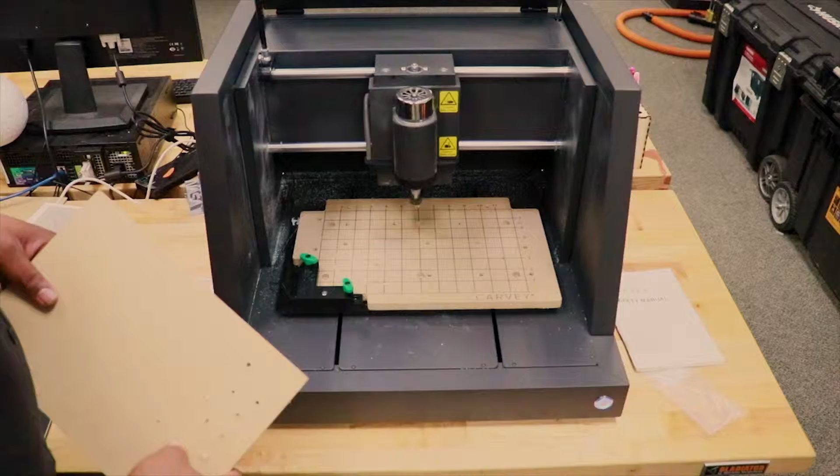Alright, so now we're looking at the inside of the Carvey. The first thing you'll notice is the platform that we have. The Carvey comes with an 8-inch by 12-inch platform, and that is a non-configurable platform, so we can't expand or change those sizes. Usually with something like this, you will not even always get up to that 8-inch by 12-inch size because of the clamps. It has a smart clamp and it has several clamps that have to be on the sides before you start your cut.

Also, it has a Z depth of 2.75, so you'd want to take that into consideration when you're choosing your drill bits, because the length of your drill bits will also affect the depth of cut that you will have with the Carvey. So right now we're just going to go ahead and set up our board and put in the clamps just so you guys can see how that would function.

So what you want to do is, depending on the depth of your material, you want to raise your smart clamp to be exactly at the corner of your material, because we're going to put in our board to just show you guys how the clamps work. So the first thing you want to do is lift up your clamps, and that would correspond to the depth of your material.

And also we have different sets of clamps for different types of tool bits. So if you have a much wider material, you would want to use a longer pin to hold your clamps down. I'll just add an extra clamp on the sides.

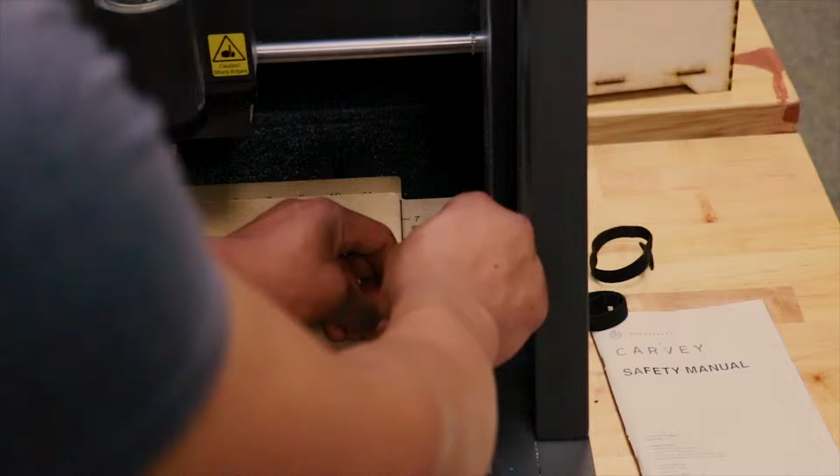Alright, so another cool thing about the Carvey is that it comes with different drill bits, and we can get all these drill bits from Inventables. They're usually $10 per set, and we usually recommend that you come in with your own drill bits just so that you're aware of the material you're using and making sure that you're using the right drill bits for it. We do have some drill bits in the space, and we will help you with your projects using our drill bits when you're just learning how to use it.

Also, the drill bits range from a 1/16 to a 1/32 fishtail bit, all the way to a ball end drill bit for smoother cuts. Another important thing to keep in mind about the drill bits is that they come in different color codes for different types of cuts. So engraving cuts, or really smooth detailed cuts, all those details are on Inventables.

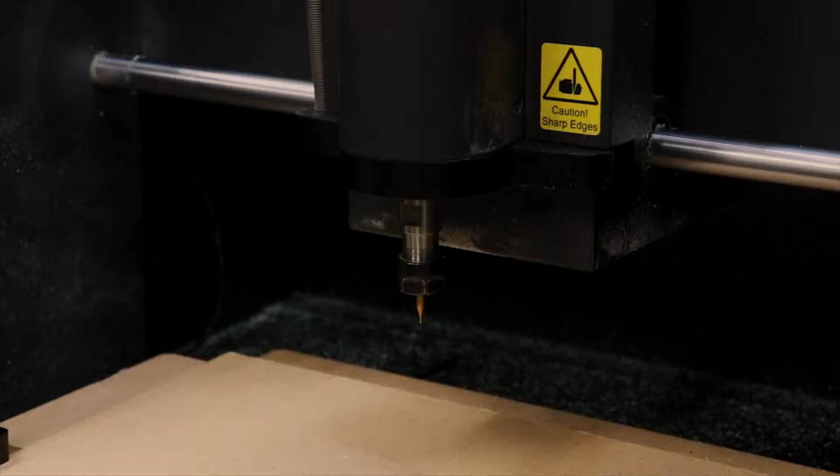Alright, so what we're going to be doing now is replacing a drill bit. To replace a drill bit, get your two size spanners. They both come in the kit, or ask for them when you're in the space. And basically, you hold and rotate in opposing directions. And that would release your drill bit from the spindle. And when you take out a drill bit, you want to make sure you put it in a place that's secure, because it can get lost very easily, and you definitely don't want that happening.

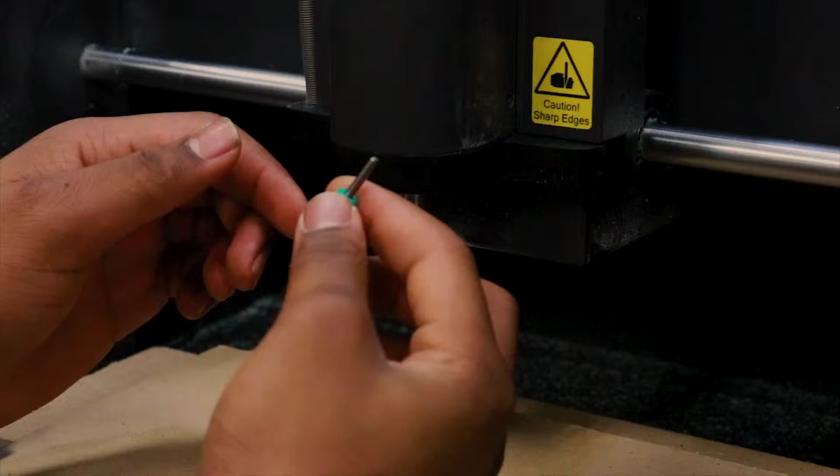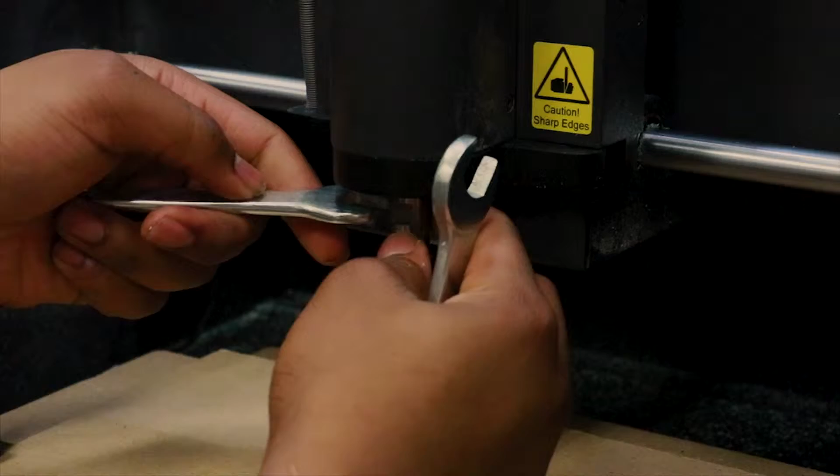Alright, so now we have a 1/8 fishtail drill bit, and usually the way you know the size of the drill bit is it's written on the ring, but sometimes if you're keeping them in sets, it's usually written on the container. So to tighten it, we're just going to do the same process, except we're going to be moving in the other direction.

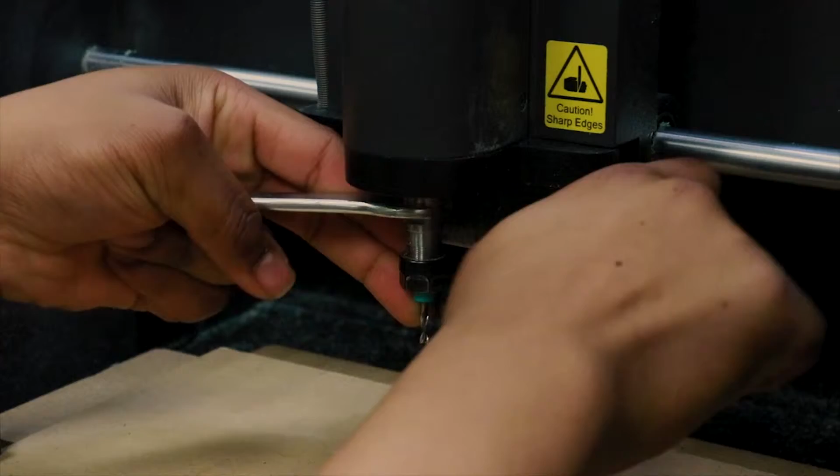And once it's tight and secure, I want to make sure it doesn't pull out or anything.

Alright, so we're going to be talking about the Easel software. The Easel software is the software that comes and works with the Carvey. You can also use other kinds of CNC cutting software, but I found Easel is the most easily accessible, and it's made specifically for the Carvey and other Inventables CNCs.

So a few things to know about the Easel software is that it is web-based browser software. So as long as you have access to the internet and a browser, you can access Easel. It is connected to your computer and connects to the Carvey via the printer cable, and the software can also account for a lot of user end settings.

So now we're going to go into Easel and we're going to set up our account. If you already have an Inventables account, you can just log in, but if you don't, you can basically create a free account. Alright, and now we're going to go into Easel.

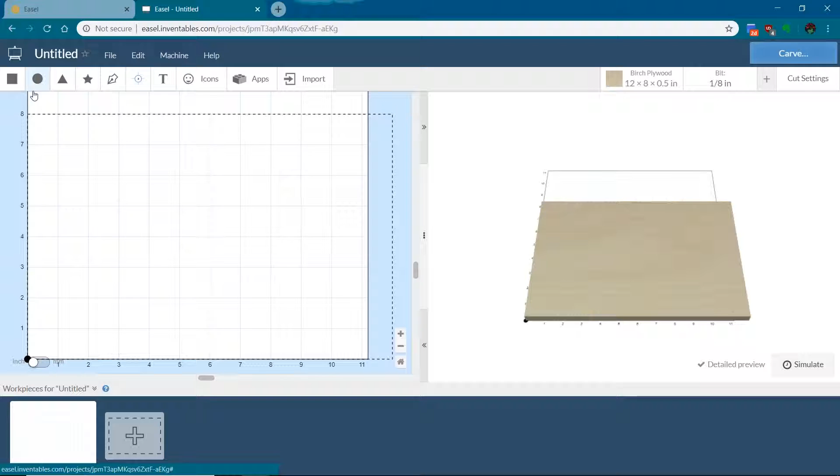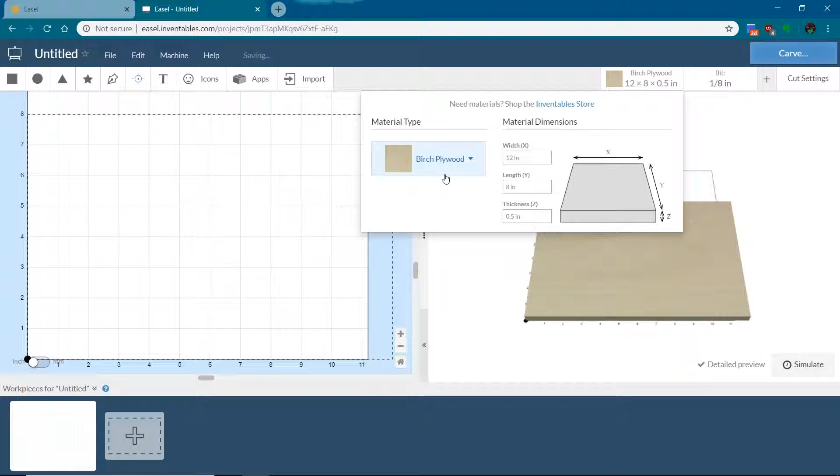One cool thing that the Easel software provides is an accessibility of different materials. If you have an idea of what material you want to cut, there's probably already a material type listed in the drop down option for you. And when you do select that material type, as you'll see here, a lot of things change, not just the material depth, also the depth of pass and the cut settings usually change with those materials. So if you had, let's say, HDPE, you see the cut settings change to adjust for that material.

There are different types of fill methods. There's the x-axis and the y-axis raster method. These are usually pro settings. The offset setting works just fine as well. You can also customize feed rate, plunge rate and depth of pass settings, but usually I would always just stick to the recommended. As long as you're using the correct material type and the correct bit, you shouldn't have to worry about changing your cut settings that much.

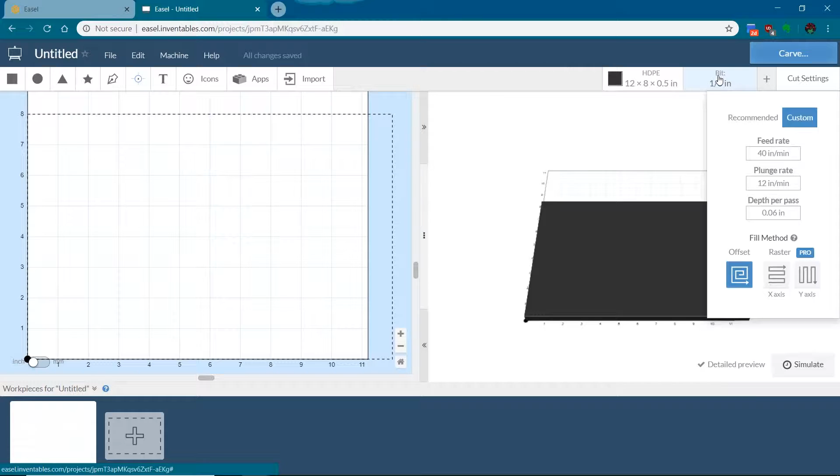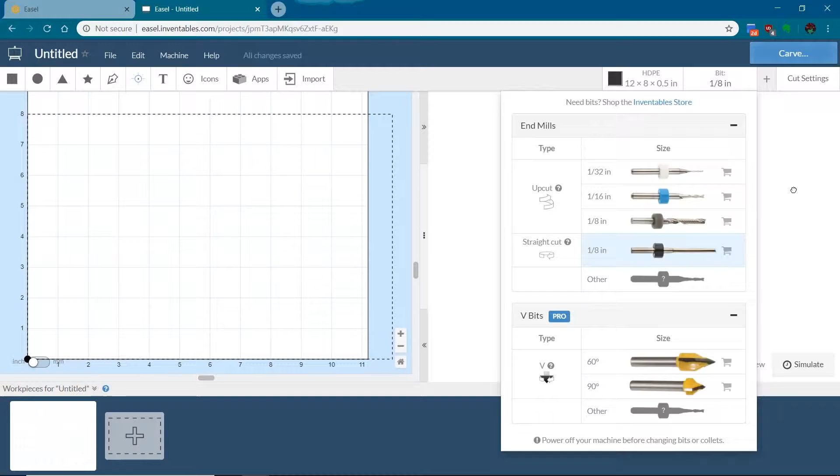We'll go into the bits. So as you'll see, there are different types of bits that correspond to the color codes we talked about with the Inventables drill bits and end mills. These will usually just be listed on here, and you can change and select them as you continue with your project. Over here we have a detailed preview that simulates anything that is in the cutting board.

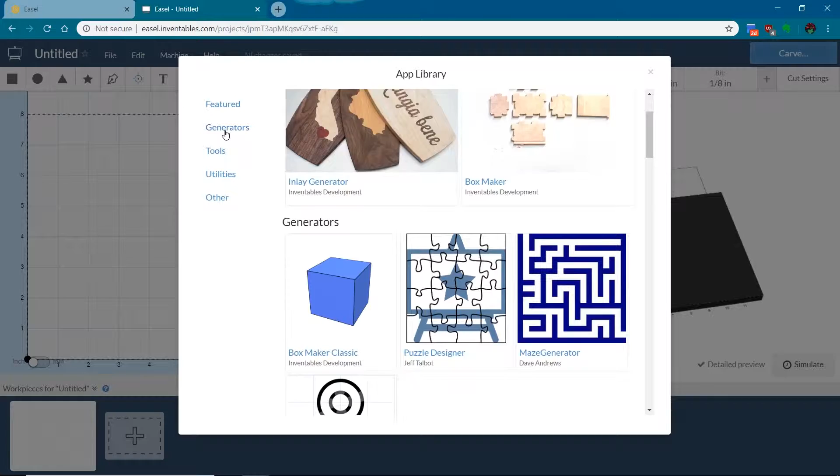We're going to work now and just import some already created files that are on here. So in here in the app library, there are different generators of things that are already made on the website that you can just import into your projects. There are different tools, utilities, and other options that you can just import and have on the go.

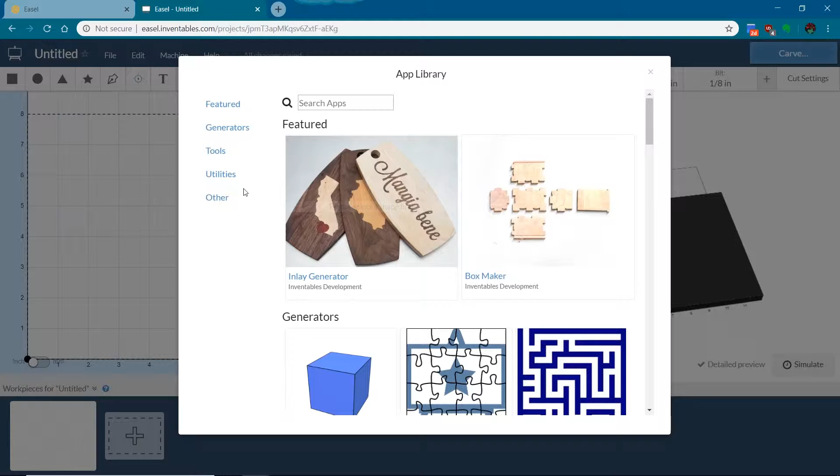We can also use the machine option to select your machine. So for this, we're using the Carvey. And the first thing we're going to want to do is to download the Easel driver. Alright, and now that it's downloaded, we're going to just allow it to install.

Let's try that one more time. Alright, maybe we should try extracting the files first.

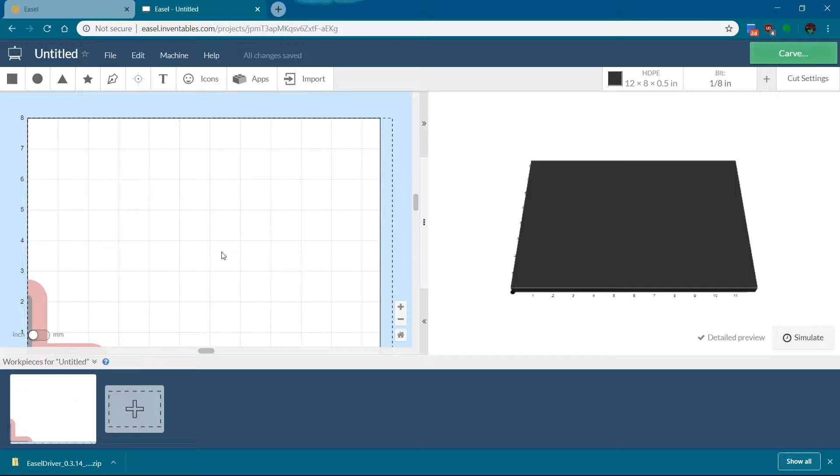Alright, and when that's finished, you are basically set to go. Whatever you upload in your menu will basically happen there. So now we're going to cut, and I'm going to go find a file. So basically we're going to go into the Inventables website, and they have a lot of projects that you can start on that basically will take around 15 minutes or less.

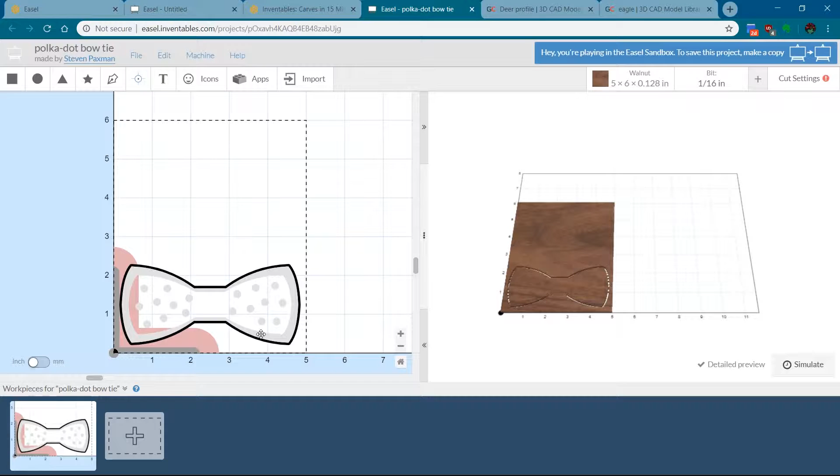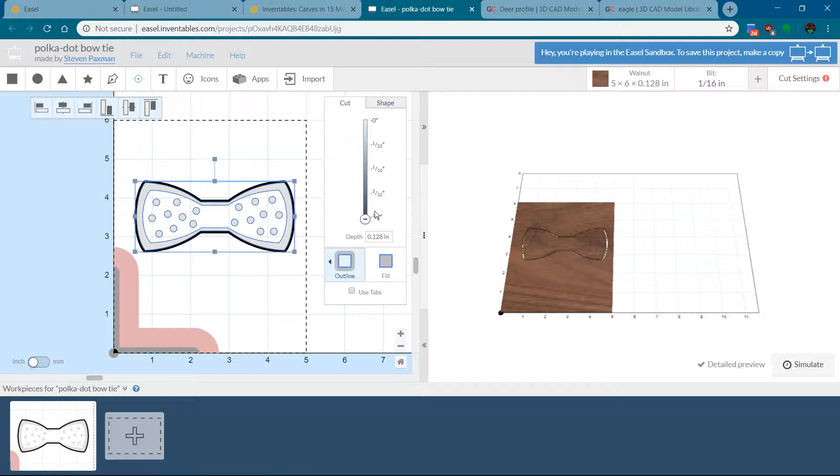And what we're going to do is this custom bow that is going to engrave some parts as well, so we can get into engraving. So on this side of the software, we'll have several options that you need to take into consideration. We have the object depth, so this determines how deep your cut is going to be. For now, we're just going to deal with an engraving, so we don't need it to go that deep.

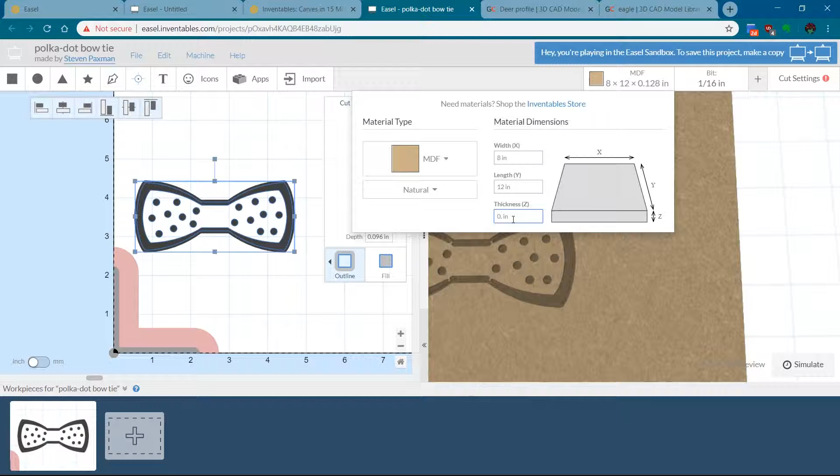We're also going to select the proper material. In there right now we have an MDF board, so we're going to select that, and also going to put in the proper dimensions, and it's an 8-inch by 12-inch board, my bad. And the thickness here, it is 0.5 inches thick. And over here in the simulate panel, you can kind of see when you have your object settings right or wrong. Clearly we don't have them set up in the right dimension, so I'm going to change those now.

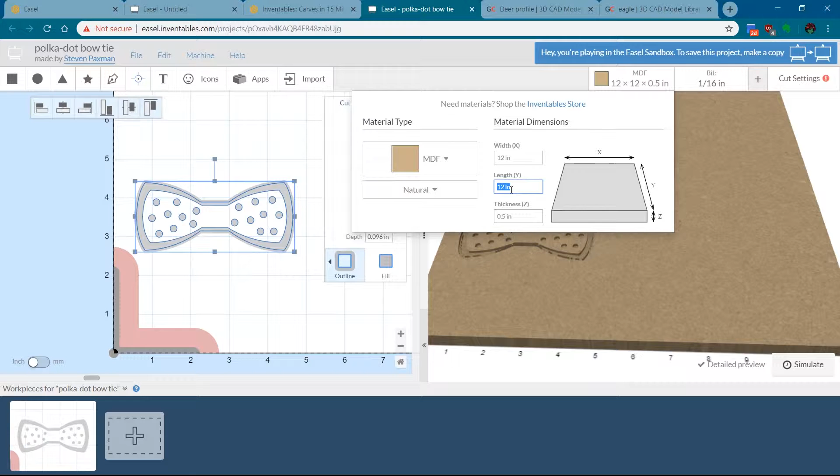Okay, so we can move our object around wherever we'll need it to be. One thing you need to consider is where exactly the smart clamp is. So whenever you're setting up your object, this area is basically inaccessible for you to use. Coming back to the material, we have two options here for outline and fill, and we even have different outline options. And this is basically for you to choose whether you want the actual object cut out, or you want an outline of the object cut out. So for now, we're just going to leave it as outlined.

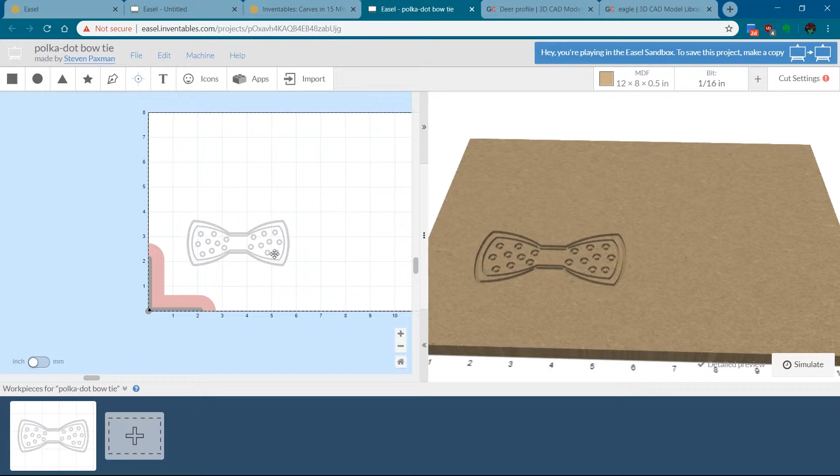You also have something for your endpoints, and you can decide whether you want your endpoints curved or straight. For now, we're just going to leave the endpoints because we don't need to edit them. Also for shapes, you have different positions for your object. You can put it in the X, Y position, or you can also change the dimensions by just clicking in and typing in the dimensions you need. We can also change the size, change the height. You can lock those so that they increase and decrease with the same ratio, and all that good stuff. So for now, we're just going to leave everything as it is.

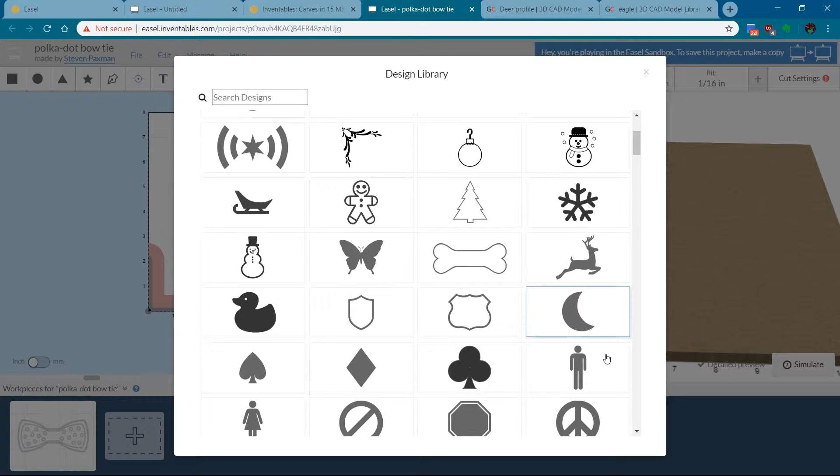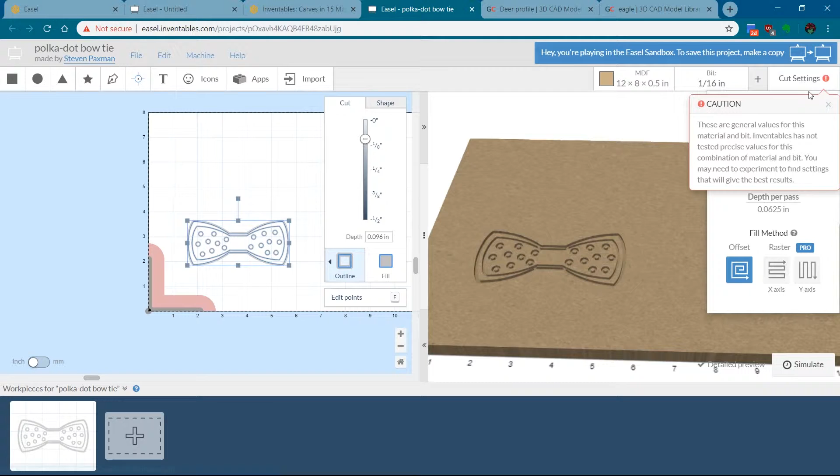We have different icons that we can add to make this even more interesting. There are definitely a lot of designs that are already handmade, so you don't always have to build your own thing, so to speak. Also, as I went over different apps and utilities and different cut settings, we have an alarm setting for the cut settings. We're going to go back and select a 1/8 inch bit. Alright, so now we're good to go, and we're set to start our cut.

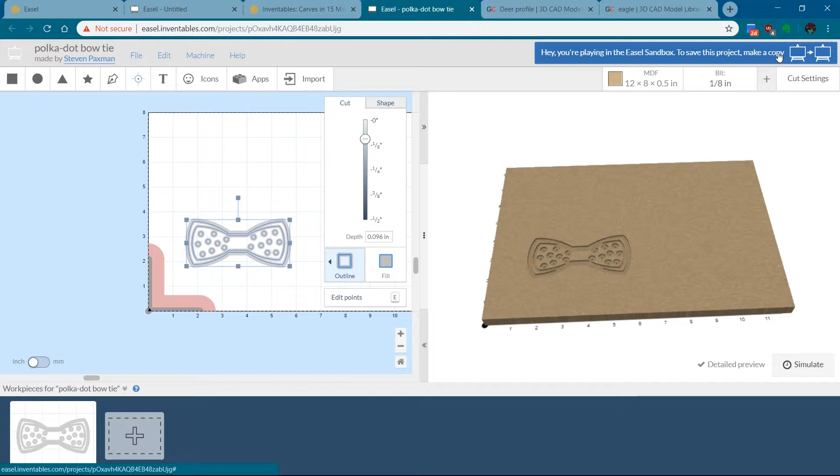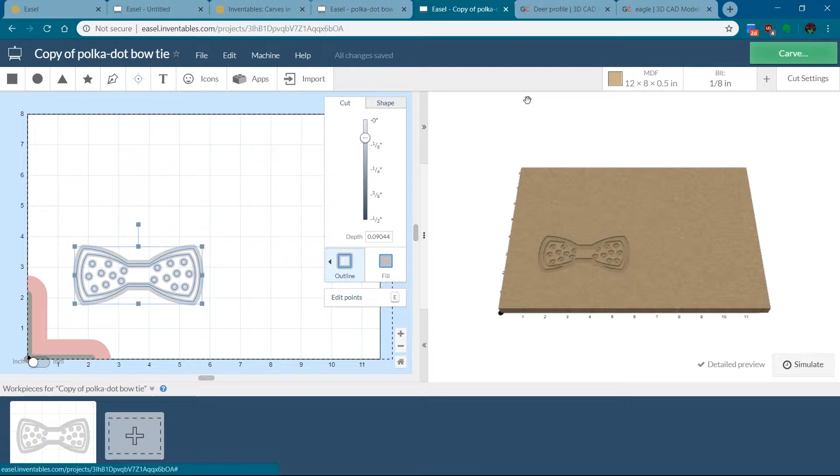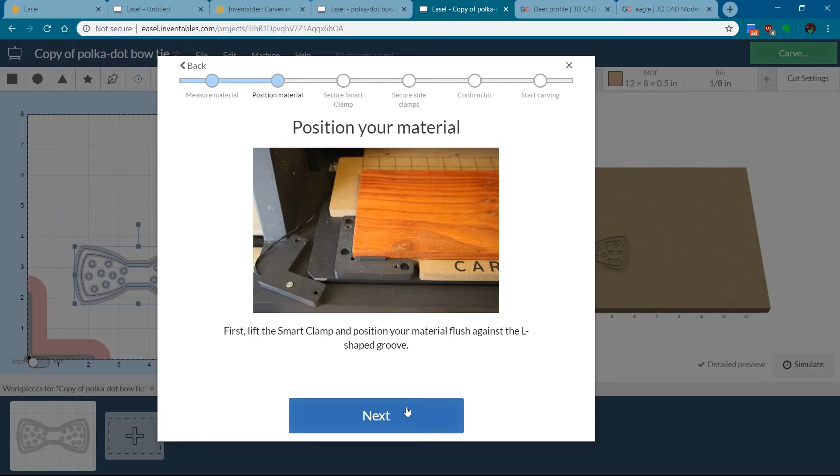So now that we're ready to carve, all we need to do is hit carve, and it's going to bring up a series of questions to make sure that we're set, and it's going to ask us to confirm the thickness. So we're just going to go back in there and make sure we have it cut to the specific depth we need, and then we're going to hit carve. So before you hit carve, you want to make sure you have the correct dimensions of your material. If you have a caliper, I would recommend you measure your materials to make sure that it's the correct height, and then we can confirm material thickness, and we can hit next. And as long as we've secured all the clamps and confirmed our drill bit, we can basically start carving.

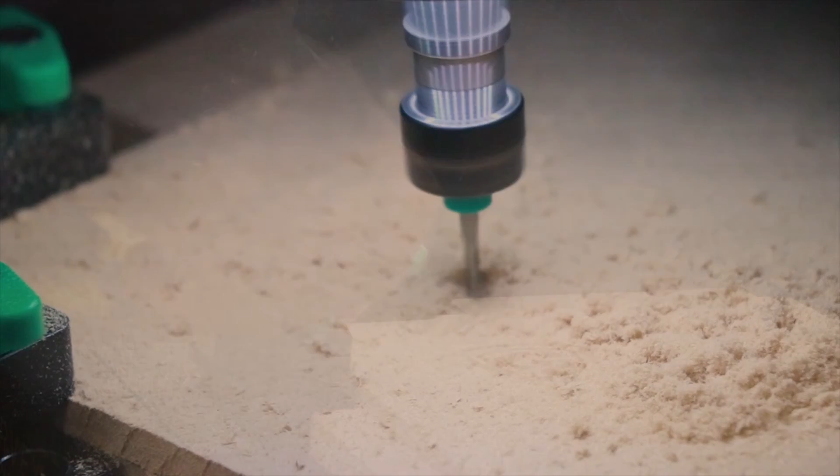Now that we're done, we're going to see a carve complete thing pop up, and you can just click on whether it looks great or not so great. And it looks great.